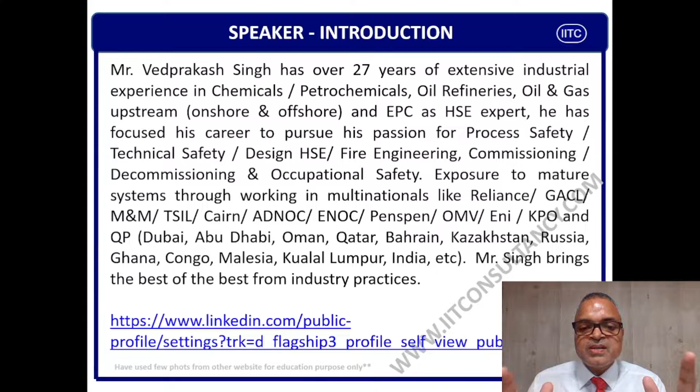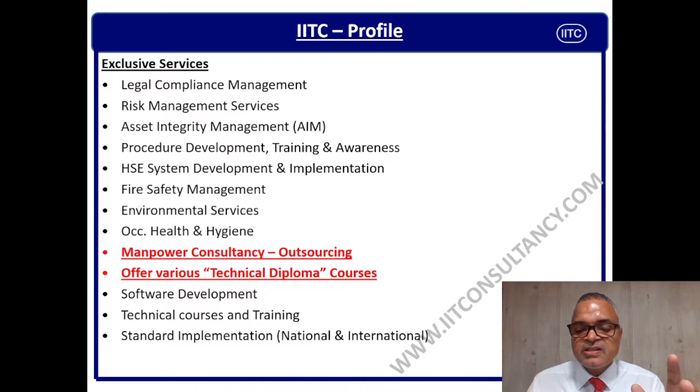These are the list of services what IITC provides to their honorable, respectable clients on a time basis, on a regular basis. These are the key competencies of IIT Consultancy and its team, and we provide services to clients depending on the requirement on a time basis.

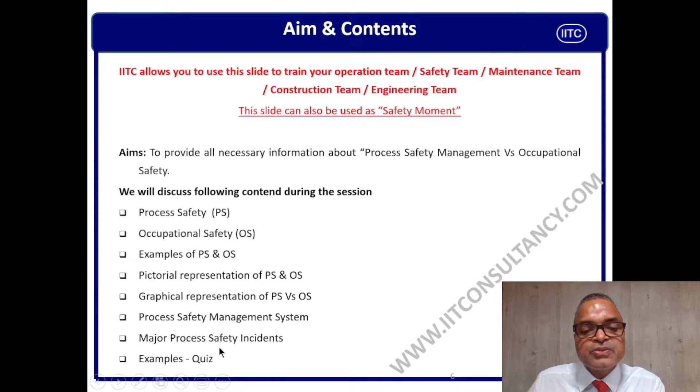Guys, let us debate on process safety versus occupational safety. As we explained in the beginning, process safety has come into the picture, as per my understanding, especially in India, in the last one decade, or let's say one and a half decades.

I started my career before 27 years, and I remember - I will not name my colleague - who used to abuse me, asking why I went and transferred into the safety department. So I did my specialization in industrial safety, and I got transferred to the industrial safety department. My friends used to abuse me, saying there is no career in safety. But I can tell you, based on my experience of the last 27 years, I had been lucky to get transferred to work for safety, like you guys.

So occupational safety came into the picture, and as per regulatory requirements, people used to give it weightage. Then sometime after 2005, I think, while occupational safety was there, process safety took the lead, because earlier it was supposed to be part of the operation department, production department, process department, but later on there was a requirement, and each company made one special department of process safety. I hope you agree with me, correct?

Guys, now I will put the ball in your court. Take 10 to 20 seconds, try to understand what is occupational safety, and then we will try to define what is occupational safety.

Here in occupational safety, the incident probabilities are very high. The likelihoods are very high. Mind it, please remember it. And incident severity, or you can say the consequence of incidents, is low. Because when we say low in occupational safety, probably you can get some injury like a cut, bruise, some fracture, eye injury, leg injury. I don't say these are small injuries, but these are limited to one person only. There is very less likelihood that more than one person gets injured in terms of occupational safety.

Again guys, I will give you 10 to 20 seconds. Try to close your eyes and try to understand what process safety is. As the name suggests, process safety means safety of processes, processes of industries, processes of different elements of the operations, right? Now let us go through the definition. A systematic approach is essential to prevent the potential release of chemicals. This deals with material, equipment, and system. Again, I just want to bring your attention that this deals with processes, materials being used, equipment being used, SOPs being used.

It is measured using all system functions like alarm rate, corrosion rate, flow rate, leak rate, LOPC rate. These kinds of terminologies are used for process safety. Here you see that in process safety, the probability or likelihood is very low, but the severity is very high. Let us compare. In occupational safety, the probability or likelihood is high, and severity is less. So I hope you are able to understand the basic difference between occupational safety and process safety.

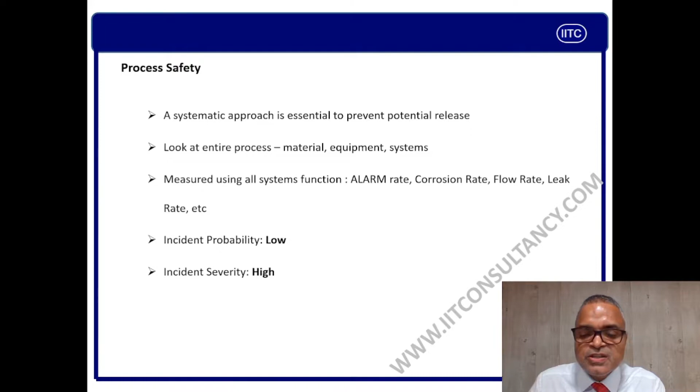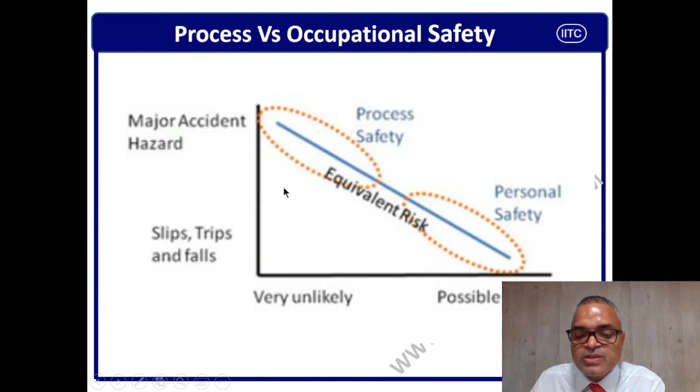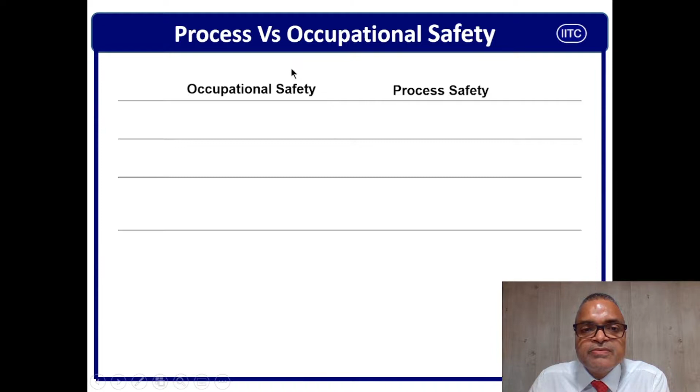Here, occupational safety: usually only a single person affected, lower consequence, less severity, with high frequency. Right? This definition we have seen in the previous slides. Now the process safety: potential for multiple fatalities, higher consequence, lower frequency. Let us see one example of occupational safety just to satisfy you.

Occupational safety means if I am doing a grinding job and something goes wrong, the grinding wheel may break and it may damage my eyes or it may cut my fingers. So probably I am the only person who is going to get affected. Or let's say if I am doing some cleaning job, I may slip and trip due to poor housekeeping. Only one person is affected. Other people are on their job. There is no effect to other people.

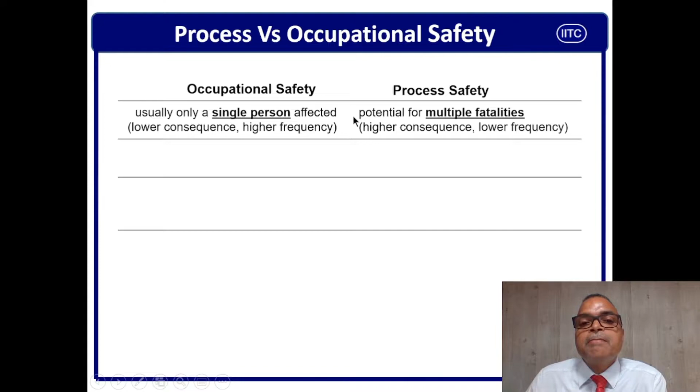But let us take one example of process safety. In process safety, as we said, this deals with man, machine, material, and process. Let's say there is a LOPC of your flammable gas, combustible gas, or toxic gas. LOPC means loss of primary containment. If your storage tank which has toxic material, toxic gases, leaks, what will happen? The moment it comes out of the storage tank, this will not kill only one person. This will kill everyone who is in the envelope, in the boundary of this gas.

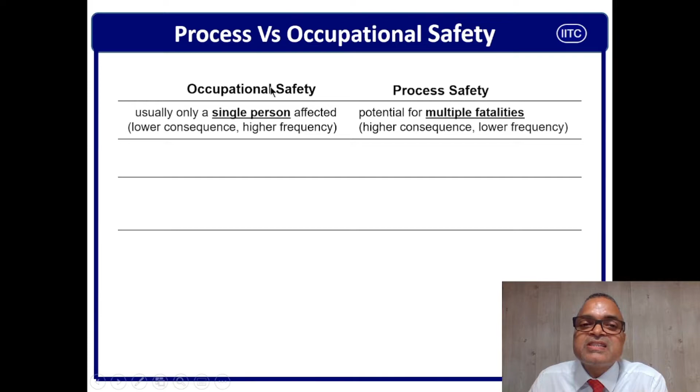It is not just whether one person or many people will be killed. What I'm saying is not killing, but affect: only one person will be affected, or many people are affected. So now you can see the significant difference between occupational safety and process safety. Now let us go for the next.

Risk results from human activities within the installation. I am doing a welding job, a cutting job, a cleaning job, I am working at height. So this is a human activity. In process safety, there is a debate, but the risk results from the physical and chemical properties of process substances. Of course, if LOPC is there, there is a human intervention, a human problem. But mainly, this is the physical and chemical property of a chemical. If a chemical is toxic, it will create a toxic exposure, and many people are going to be affected.

If this is flammable or explosive, if it comes out, there is a possibility of ignition. If it explodes, there are many people in the envelope of fire or radiation zone. So anybody who is in this zone will be affected. So you see the difference. This is the human activity and this is the chemical and physical property of process substances. I hope you understand.

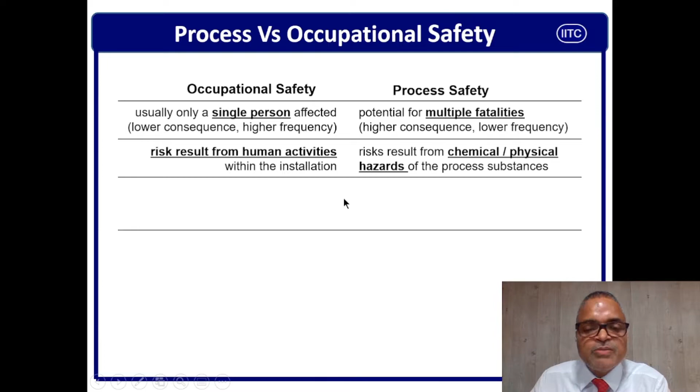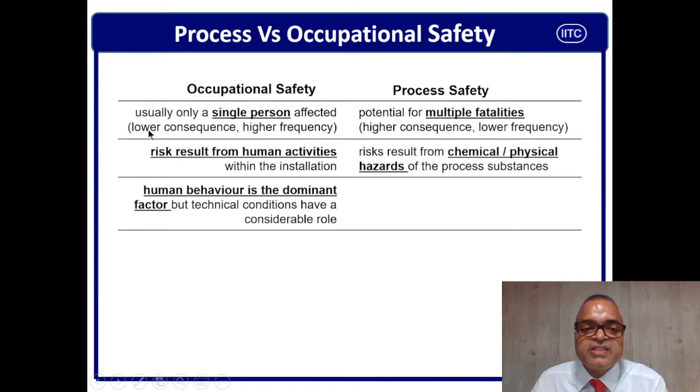Human behavior is the dominant factor here, but technical conditions have a considerable role. Here, basically, this is human behavior. This is why, to improve this, we have many systems like BBS, behavior based safety, and safety culture transformation. These are related to behavior, and yes, technical conditions are also playing a considerable role. This we will see separately.

Technical systems are the dominating factor here, but human actions have a considerable role. Like in the first point, there is a role of human intervention, but technical things are more dominating. Like which chemicals are to be used, whether more toxic or less toxic chemicals. This depends on our technology provider. This also depends on our services, processes, reactions.

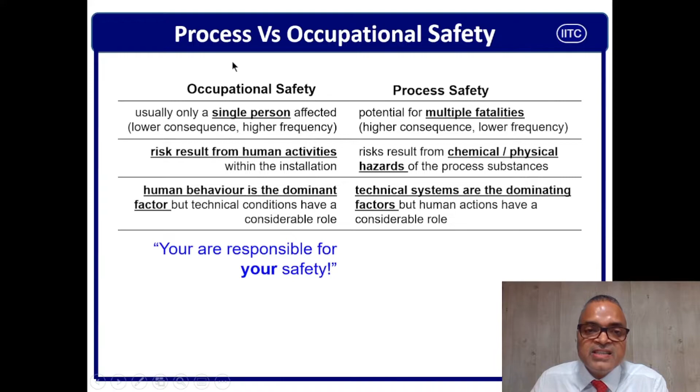Now here we are saying that in occupational safety, you are responsible for your own safety. If I am doing a welding job, your safety officer is liable, but you are responsible to see that your eyes are not getting welding arc eye. You have to use the safety goggles, the welding goggles. Here, in process safety, you are responsible for the safety of your colleague. You have to ensure that there is no possibility of LOPC, no possible source of ignition. So here you are responsible for your colleague.

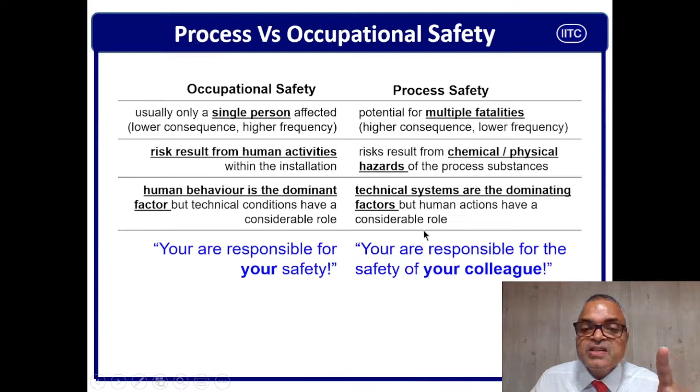So that means to ensure process safety and occupational safety, as per the definitions we have seen, there are systems called management systems or safety management systems in place in many organizations.

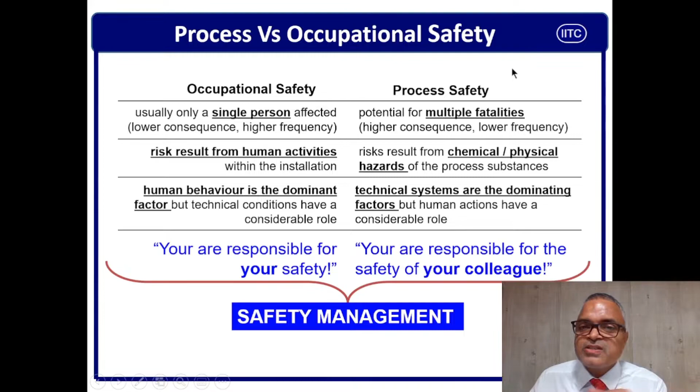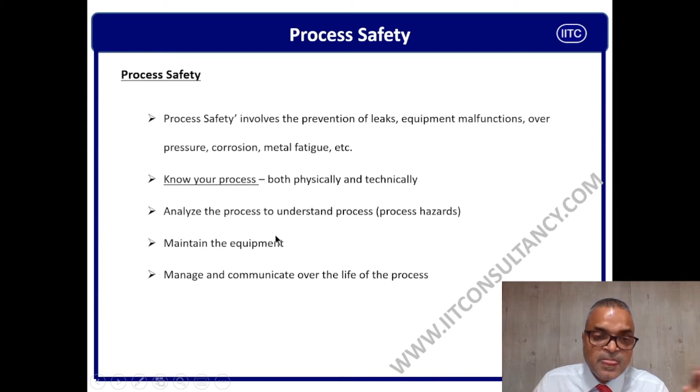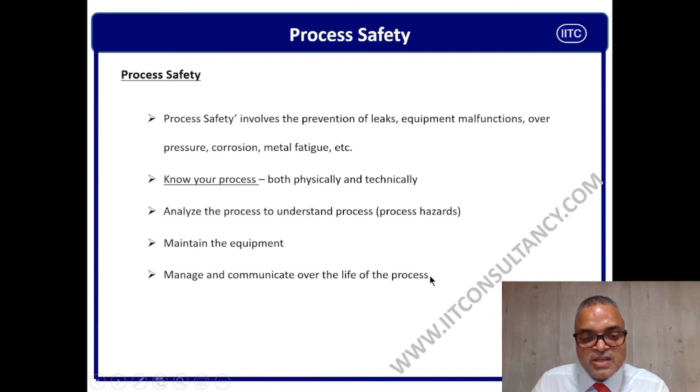Manage and communicate over the life of the processes. We have to manage and communicate over the life of the processes. That means from design, construction, commissioning, operation, and decommissioning. Complete life cycle we have to manage. Otherwise, one small mistake can create havoc, and this will be a very, very costly incident because process safety does not kill one. Process safety kills everyone who is in the envelope, in the boundary, in the battery limit of the process safety event. So, guys, these are the basic understanding of process safety.

So, guys, let us give a few seconds to understand process safety management very quickly. I will not take much of your time. Process safety management is a proactive approach or process where we need to identify the hazard. Second, analyze the hazard.

Then evaluate the hazard on a qualitative or quantitative basis. There is QRA - Q for qualitative, Q for quantitative. There is a qualitative assessment based on the risk matrix, and there is a quantitative risk assessment based on international standards that are a very essential part of process safety. I would request you to please go through my training program on quantitative risk assessment.

You will understand the basic meaning of process safety in terms of QRA - safeguarding of releases of hydrocarbon substances, hazardous substances, and process accidents. I would like to say that process safety incidents are those incidents when there is a LOPC of hazardous substances. Let's say if there is a pressure vessel or a pipeline filled with water, and this leaks. On another side, if there is a pipe, a storage tank, or a vessel filled with toxic gas like H2S or SO2, and this leaks.

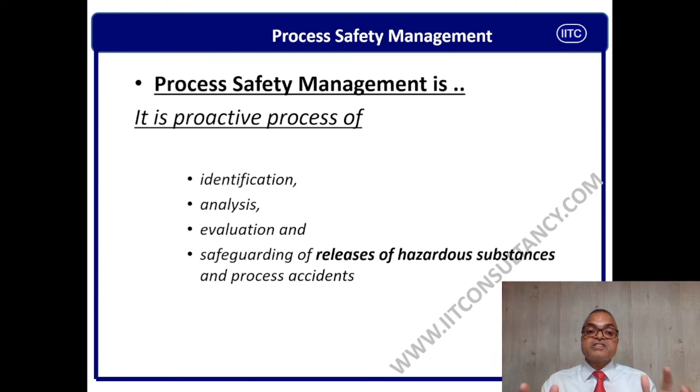How are you going to create the differentiation? A water leak is a process event, you can say, but this is not so severe. This is very hazardous - even we cannot dream of leaking H2S, SO2, or chlorine, or this kind of toxic substance, or ammonia. So you understand the basic - we need to safeguard the release of hazardous substances and process incidents by any means, always.

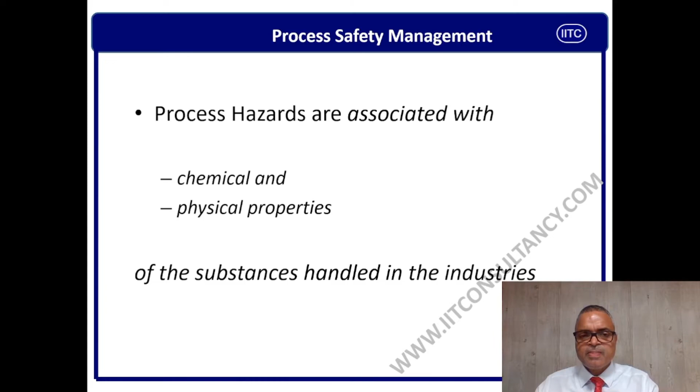Guys, as mentioned, process safety deals with physical and chemical properties of substances. So process hazards are associated with chemical and physical properties of the substances being handled in the industry. If there is no hazardous chemical, there will be no process safety events. In an engineering company with a lathe machine, milling machine, drill machine, drying machine, or grinding machine, there is no chance of a process safety event until they have got ammonia, chlorine, or other chemicals for utilities. Correct? Yes. So guys, what are the chemical properties? Why are we so scared?

Because a chemical has basically 4 inherent properties or qualities. First is flammability or flammable hazard. Second is toxicity - a chemical may have toxicity in nature. It has explosivity, explosion potential. It has reactivity. So we must know all these 4 properties of each chemical - what is being stored, transported, handled, used, or produced in your industry.

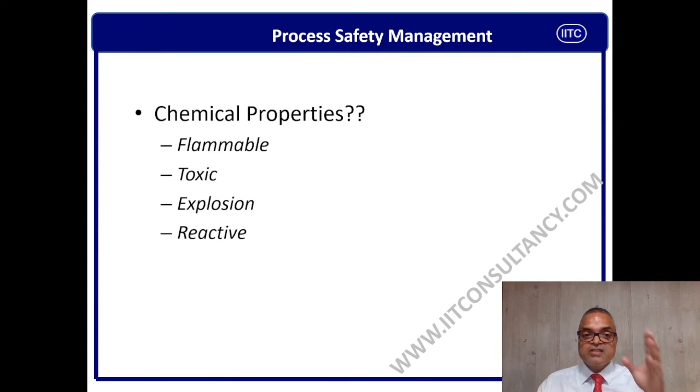If you are able to manage all these properties in the tank, in the storage tank, in the process vessel, in the supply tank, in the transportation - that means you are safe. There is no process safety event.

Here is the PSM system model. This is a small piece of information I am interested to provide in this slide for you guys. I am very sure you may be knowing this, but if you are not knowing this, please give 2 to 5 seconds to understand. Basically, process safety starts with the people. This is a team job - this is not a one-man job.

And this starts with the knowledge of people, not necessarily related to your stream. You may be a perfect mechanical engineer, process engineer, chemical engineer, or instrument engineer - but this knowledge deals with process safety knowledge. So it says that you have to build it right, design it right, construct it right, and then commission it right.

After commissioning, you have to operate it right. You have to ensure that all the operating parameters are maintained and no parameters go out of the operating range or design range. Then maintain it right - you have to do continuous maintenance, regular maintenance, preventive maintenance, so that all the equipment, all the safety instrumented functions, all the safeguards work as per intended design or requirement.

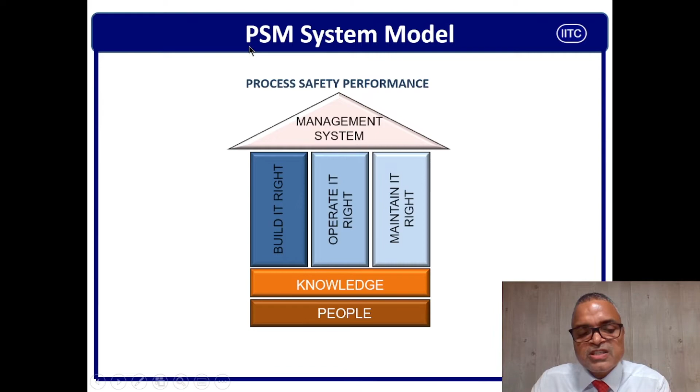And if we are able to see all these things in the square or rectangle, that means to manage this, we have got a system called the management system. And this system is nothing but the process safety management system. I hope you understand - I am not taking much of your time because I have other things to deliver. So with this, I will go for another topic. If you are interested in the PSM model, I would recommend you to see my process safety management module in the slide.

PSM can mean a lot to the business. Process safety management is not an expense, it's not an expenditure, it's not waste. It is an investment. It will maximize plant availability.

How? Because if your processes are correct and your equipment is healthy, that means there is no shutdown, and it will increase plant availability. For example, if you have a pump with a mechanical seal and it is leaking, you should stop it immediately, or ensure there is no leak. That means the pump will not fail and your plant keeps running, increasing plant availability.

And if the plant is available, there is more production, no accidents, people are satisfied, people are happy, people feel safe, then definitely money and revenue will come.

As you know by now, we understand the damage to reputation caused by incidents. I would request you to discuss with your senior friends, with the CEO or CFO, about recent major incidents where they lost many lives, lost production, or lost customers. Then you understand the value of reputation. There is a huge loss of reputation due to process safety failures.

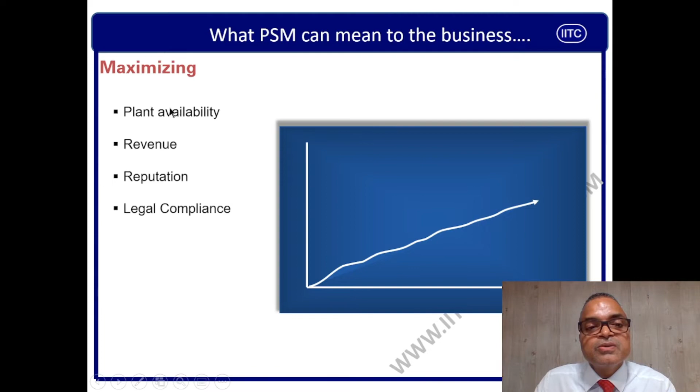So that is why if you see the X and Y axis, this will always increase like this, maximizing these four elements. We have seen what PSM can maximize. Now we will see the part it will minimize. PSM will also minimize something, my friend. This is the y-axis, this is the x-axis, starting from here, and it comes down.

What comes down? Manning cost. How? Just giving an example: if there are many accidents in your company, people get sick. If people are sick, they will not come to work. If people don't come, you have to give overtime, which increases your manning cost. If a person is happy, they will be more productive, and if they are more productive, there is more production. So manning cost will come down per unit of production.

Let's say, God forbid, if something goes wrong and someone dies, you have to bring in new guys. The person who died was very experienced; the new guy will not be so experienced. Ultimately, the new guy will not be able to produce as much as the old person, which means you are increasing manning cost. So with good PSM, the manning cost will be reduced or minimized.

Material cost: if you have chemicals or production processes where dust is generated, and if dust escapes the process containment, you are losing production and losing material, making your material costly. With good PSM, there is no chance of fugitive emissions or chemicals escaping, so your material is saved and recovered, meaning material cost will be minimized.

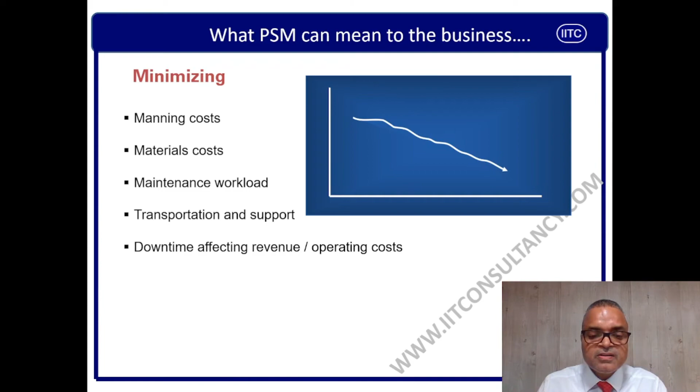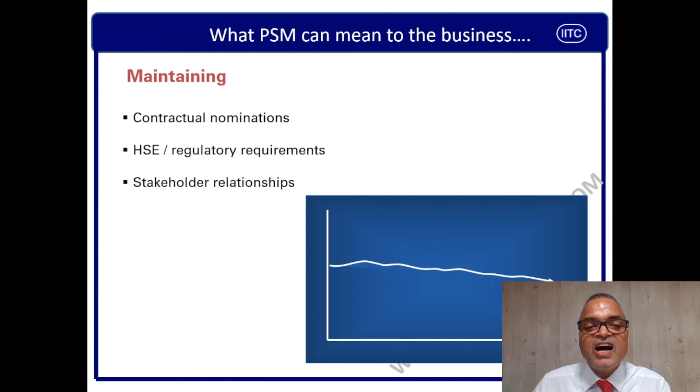Guys, let us go through this quickly. I will not take much time to explain the incidents - I am trying to make you remember, make you understand what the incidents were and what the cost of the incidents was. Texas City, 2005 - can you forget it? If you are in petrochemical, oil and gas, refinery, chemical, dyes intermediate, pharmaceutical, or steel plants, you cannot forget this incident, and nobody can.

Chernobyl, Minamata disease - can you forget it? No, one process safety event. Buncefield - can you forget it? No, you cannot, and nobody dealing with oil and gas can forget it. Many companies in the world have learned lessons from Buncefield, Texas City, and Piper Alpha. There were many revolutions in process safety, and that is why, because of these Major Accident Hazards, process safety came into the picture - earlier it was ignored. Petrobras, we cannot forget the Macondo well - this has ruined the life of British Petroleum. Still, BP is not able to stand up after this incident. One small ignorance, one small mistake, one process event can ruin an entire company.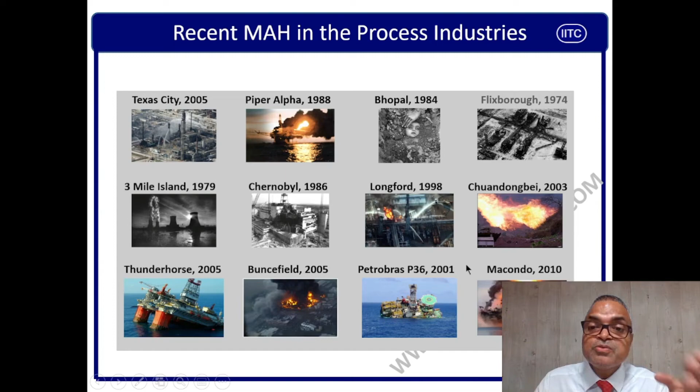Guys, I have compiled some events with respect to some process safety pillars. Safe siting of occupied portable buildings is a main pillar of process safety. Permit to work is a pillar of process safety. Management of change is a pillar of process safety. Liquid release, which is a Loss of Primary Containment (LOPC), is a pillar of process safety. Avoiding tank overfill is a pillar of process safety. Avoiding brittle failure is a pillar of process safety. Alarm management is a pillar of process safety. Vapor gas release, which is also LOPC, is a pillar of safety.

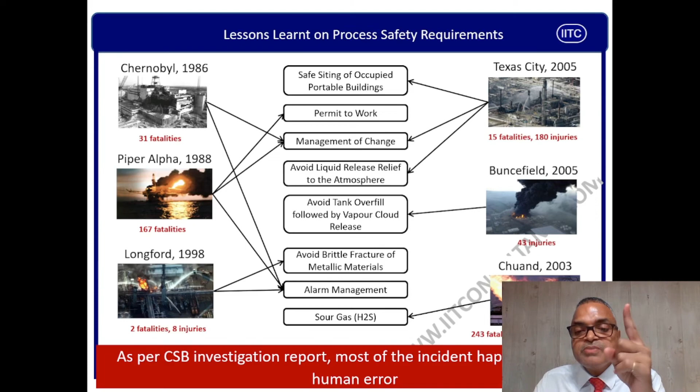I have gone through the investigation report of this, and I can tell you this was sheer failure of the process safety management system. So, toxic gas leak incidents: 31 fatalities in Chernobyl, 167 fatalities in Piper Alpha, 2 fatalities and 8 injuries in Longford, 15 fatalities and 180 injuries in Texas City, Buncefield 43 injuries, and Chuand where 243 people died and 9,000 were poisoned. Can you believe this? One small incident can ruin the entire life of people and their entire family, as well as the entire country, entire city, and the company. So can you understand the cost of a process safety event?

Guys, now let us have a quiz. This will go very quickly. I hope you are able to understand me. I will give you 5 seconds to think about it - not to tell me, since you are away from me. Is it occupational safety or process safety? Of course, this is occupational safety, as you know it very well.

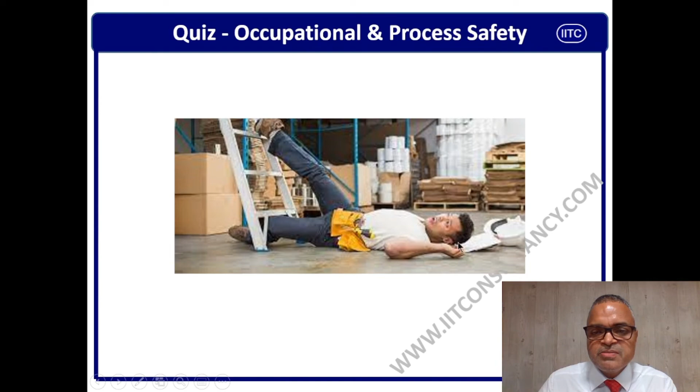Occupational safety or process safety? This is fire - that means this is LOPC, loss of primary containment. Some explosive material or toxic material has come out of the containment, there was ignition, and this resulted in fire. One or more persons would be affected if they come within the envelope or boundary or battery limit of this fire. So this is process safety. One process safety event is LOPC, loss of primary containment, which means process safety.

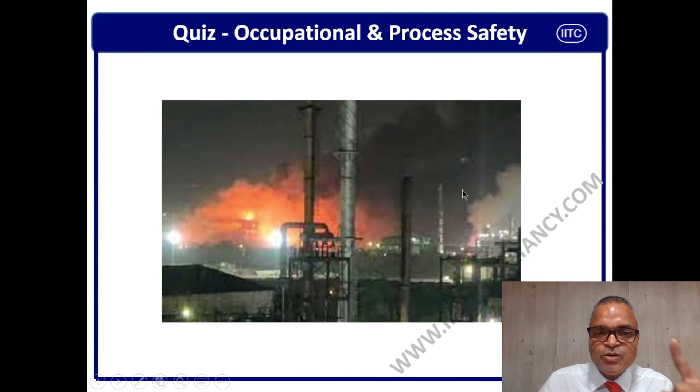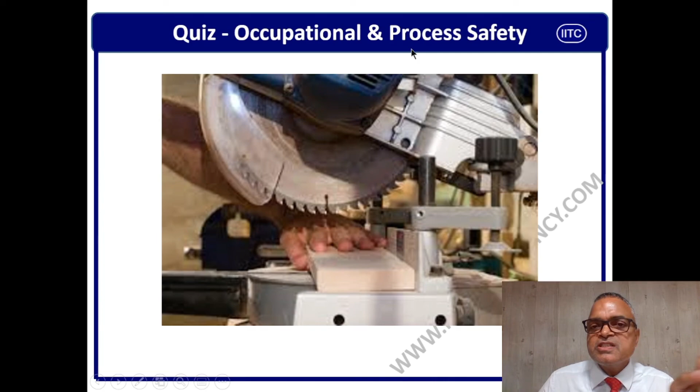Try to understand: where there is LOPC, loss of primary containment, then only process safety comes into play. If there is no LOPC, there is no process safety. This is the thumb rule. This is the definition of process safety.

What is this? This is LOPC, loss of primary containment. There is a fire, so this may create fire radiation. If 37.5 kilowatts per meter square is present and a person is within this envelope, the person will be affected, and more people could be affected. This is LOPC. This is absolutely a process safety event.

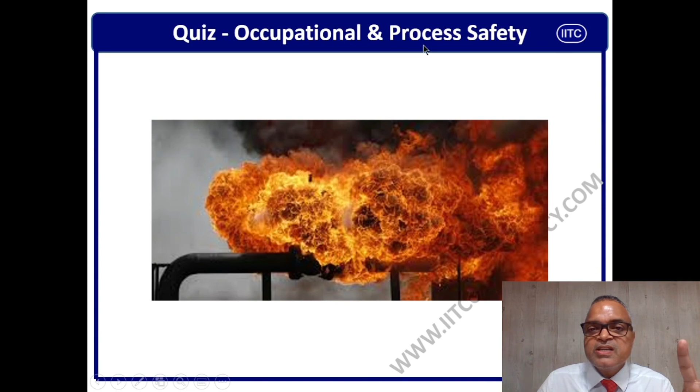Okay guys, I will give you 5 seconds. For example, of occupational safety, can you list out 5 examples of occupational safety? 1, 2, 3, 4 and 5. And you have done it. Thank you very much. Guys, now be ready for the next one.

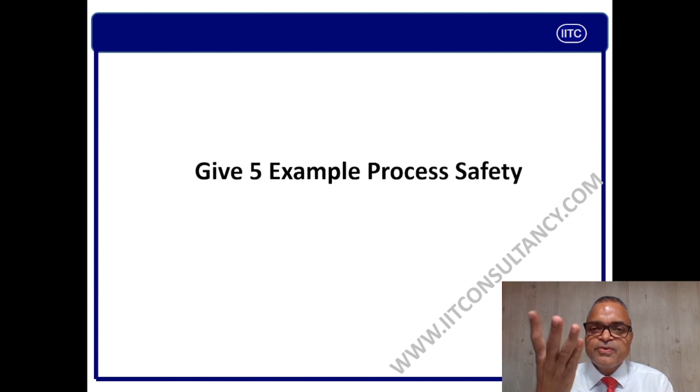Give 5 examples of process safety. 1, 2, 3, 4 and 5. I know you have done it. Thank you very much.

Guys, this is the basic module for process safety. I have done an exhaustive program for process safety management as per the 14 pillars of OSHA. I would encourage you to please go through that program to understand PSM completely.